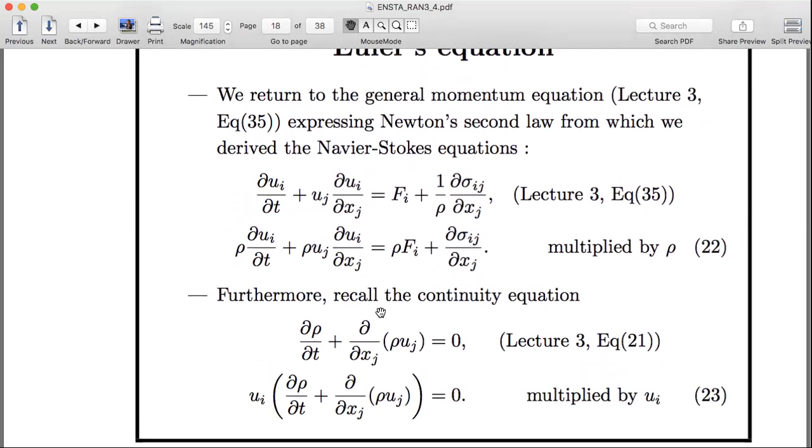We leave it in momentum form, but we just go back to the control volume version, as you'll see here. So we return to that general momentum equation, which is not the Navier-Stokes equation, but it's the one written here. It's not Navier-Stokes because I have the stress tensor.

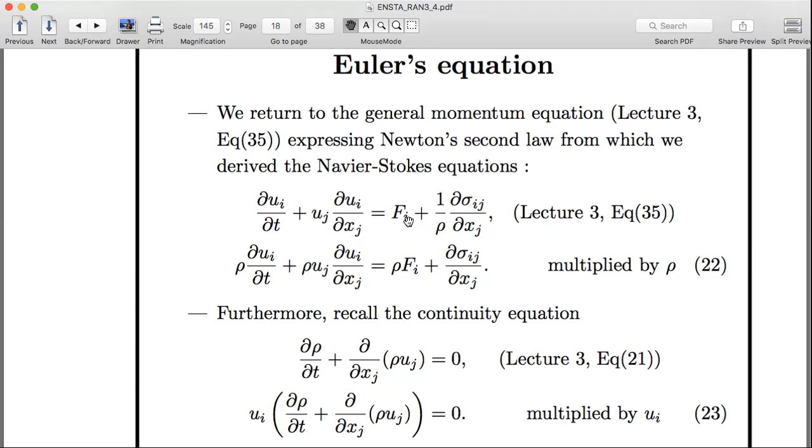It's Newton's second law applied to a continuous medium, a fluid, but I haven't committed myself on the form of the viscosity, so I just left the stress tensor in its general form here. Then I multiply by the density so that it appears in the numerator in all terms except the stress tensor.

And then I'm going to use the continuity equation, which was also from lecture 3. Remember, that's the one with a funny name, but it actually expresses the conservation of mass for a continuous fluid, a continuous medium. But that one I multiply by the velocity.

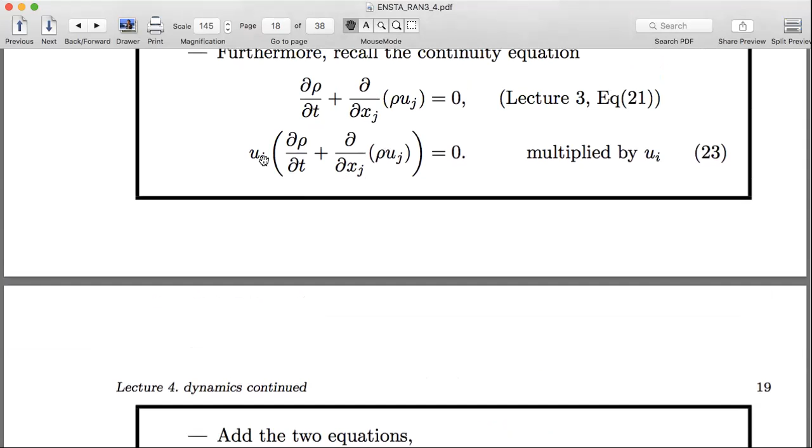So I'm multiplying by u. It's important to pay attention to the indices, so I'm multiplying by ui, not uj. The j index here is the same as the one there, and then I multiply by i. So there's a sum over j, and then all that sum is multiplied by ui.

And then we add the two equations, and we get this equation. There's just 0 on the right-hand side of 23, so it doesn't add anything, but on the left-hand side, we have this extra term.

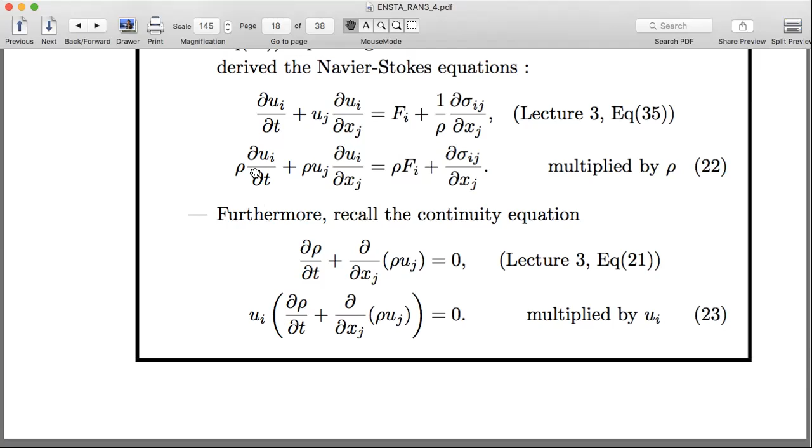Here I have rho times the partial derivative with respect to t of ui, and then here I'm going to have ui times the partial derivative of rho with respect to t. When you combine those, the motivation is to be able to combine those two terms, like this term and the first two terms here, they're going to combine to give you this one single term.

And similarly, with the third and fourth term, you can join those two together and write them like this. So that should be familiar from differential calculus.

So this is like our general momentum equation. This is valid for a general continuous medium, such as a fluid. So we're more general than Newtonian fluids here.

And it does not have to be incompressible either, right? It could be a compressible fluid. So this would apply at high Mach number in the atmosphere.

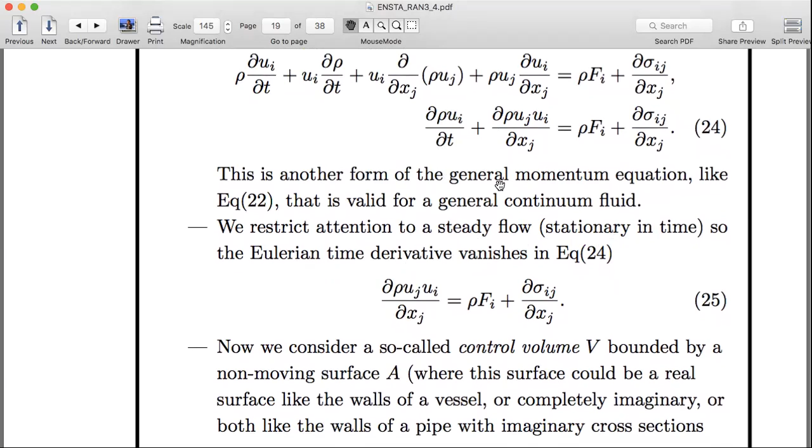But let's start introducing some restrictions to simplify this. Let's apply it to the case of a steady flow, in other words, it's stationary in time. So the Eulerian time derivatives vanish, so this term no longer appears, but I still have the advective term. That's all I've managed to do with that stationary time approximation.

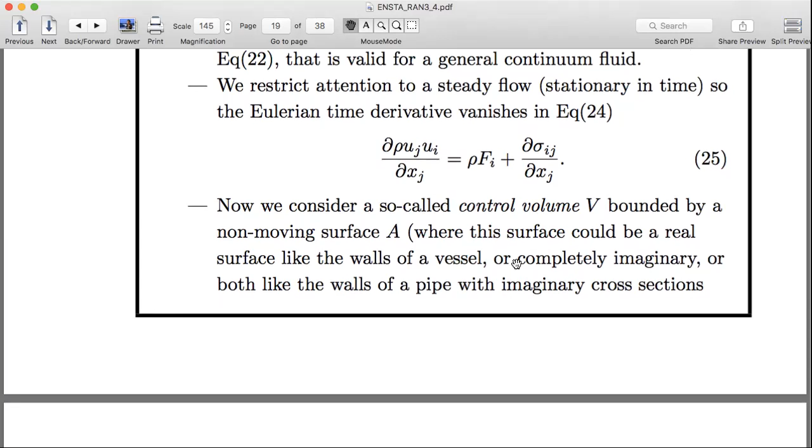And now we consider this applied to a control volume V, an imaginary surface that we cut in the fluid. It's important that that control volume be inertial. I suppose it could move with respect to our reference frame, but it would have to move at a constant uniform velocity. But the simplest thing is that it's not moving, it's just an imaginary surface, just to allow us to talk about a certain volume V of the fluid.

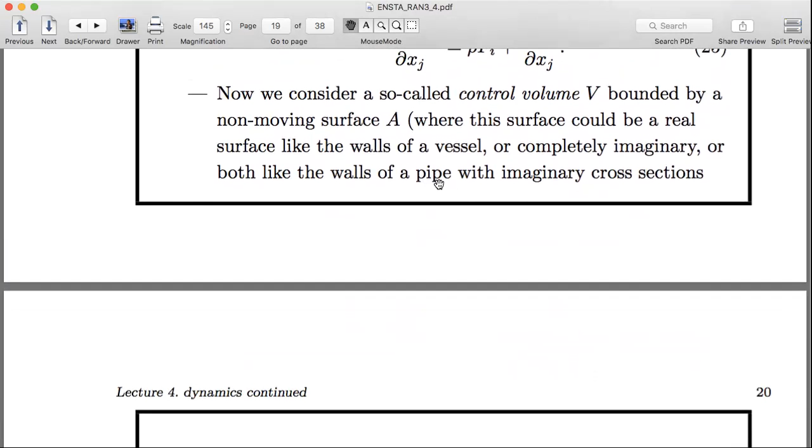But it could happen to. Sometimes we line up those imaginary walls with the real walls of the vessel or the pipe wall or something.

But it is required to be in the fluid. We're not allowed to take it out of the fluid. That'd be cheating.

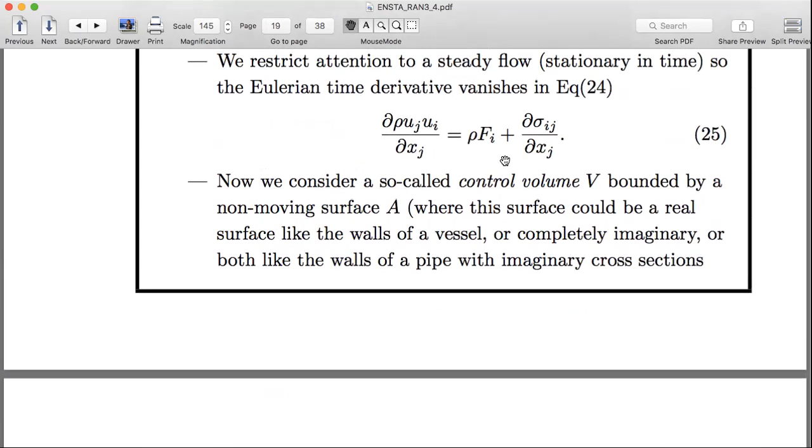And then we integrate this equation, number 25, over the volume V. So what does that mean? When you integrate that, that's just a differential equation. How do you integrate that over a volume?

Well, you take your volume V, you cut it up into a large number of little volumes, for example little cubes, each of volume dV. And if these have a very small volume dV, then these quantities here in the integrand will be essentially constant.

And these terms here, by the way, are the terms that we saw in equation 25 - that's the equation we're integrating. So you multiply their value at that point in the volume V by the little dV, and that gives you a value, and then you add that up over all these volumes. Technically, you're taking the limit where dV goes to 0, so you have an infinite number of those things to add up, and so you call it an integral. An integral is like a continuous sum.

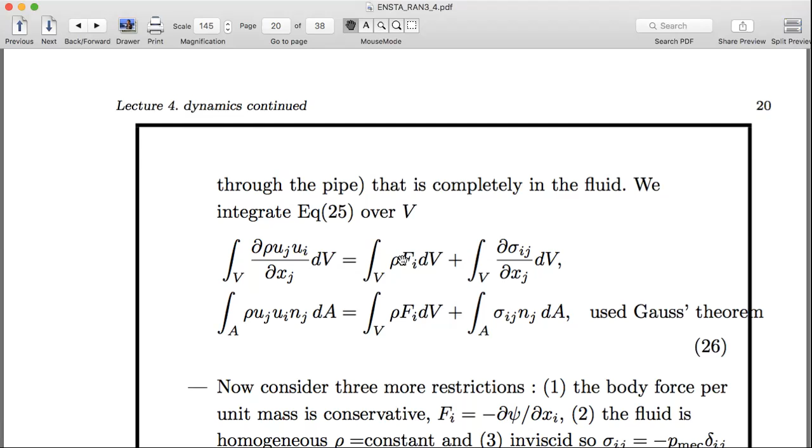So I do that for each of the terms in equation 25. You're allowed to just do it to the left-hand side and the right-hand side, and then break that into two separate integrals. It's because of the linearity property of this integral operation.

And then I'm applying Gauss's theorem to two of the terms. And how did I pick out these two terms? Well, because those are the terms that have a partial xj here - partial xj from the advection and from the divergence of the stress tensor.

So this is sort of going the other way in Gauss's theorem, but Gauss's theorem goes in both ways. When we have a partial xj in a volume integral, you can pass to the corresponding area integral by simply taking the thing in the numerator and multiplying it by the normal vector.

Which component of the normal vector? The nj - the j has to be the same as the j there. And so here I have a sum over j because there are two indices j, and I still have the two indices j here. It's just now it's on an nj.

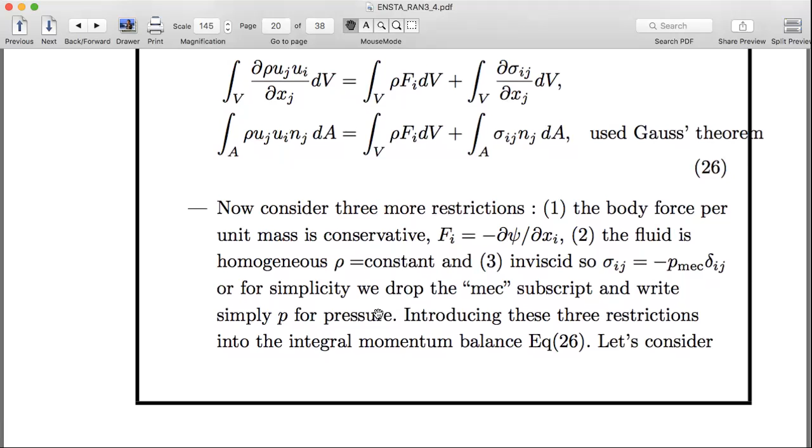So Euler also considered the case of rho being constant and the body force being conservative. In other words, you can write the force as the gradient of some potential, and I've written the potential psi here - normally psi would be the gravitational potential. We're not going to write little MEC everywhere to remind us that it's the mechanical pressure - it's the mechanical pressure that enters, and we'll just call it P.

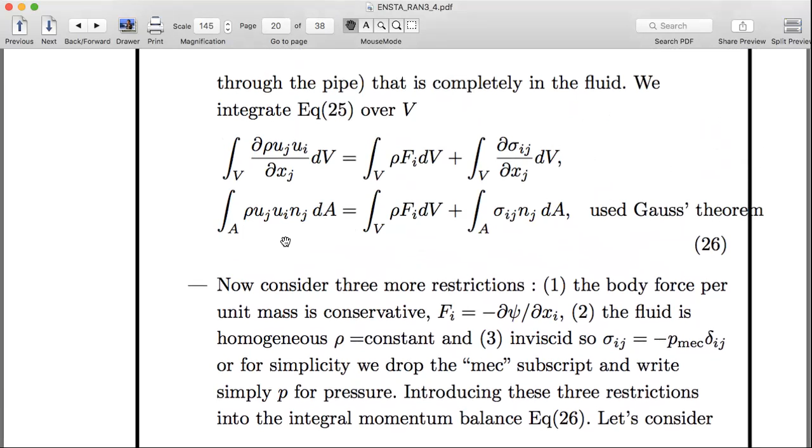So we introduced those 3 restrictions in this balance that we derived quite generally for a steady flow. It was a very general fluid, but steady flow, no Eulerian time derivative. Now we introduce these 3 inviscid, homogeneous, conservative body force approximations, and we get

the term simplify. So let's go one by one. Let's look at the body force integrated over the volume. Well, the body force was a gradient, because it's conservative, it's a gradient of a potential.

But if it's the gradient of a potential now, and we're integrating over a volume, we can do that Gauss's theorem thing and replace the partial xi with an n, and the whatever's up here in the numerator, psi times n. Which component of n? Well, it's the thing you took the derivative with respect to. So instead of xi, it's ni here. And it's an area integral here instead of the volume integral. And

rho is just a constant, so I can bring it inside the integral here. It's like bringing it inside a sum of an infinite sum. Okay, so that was the body force term.

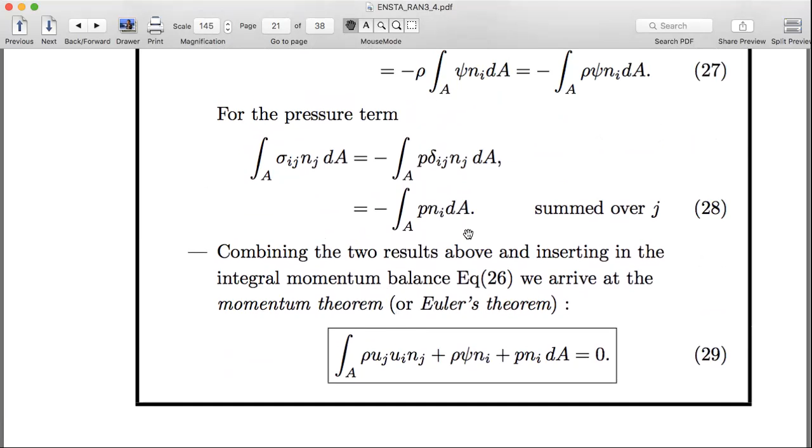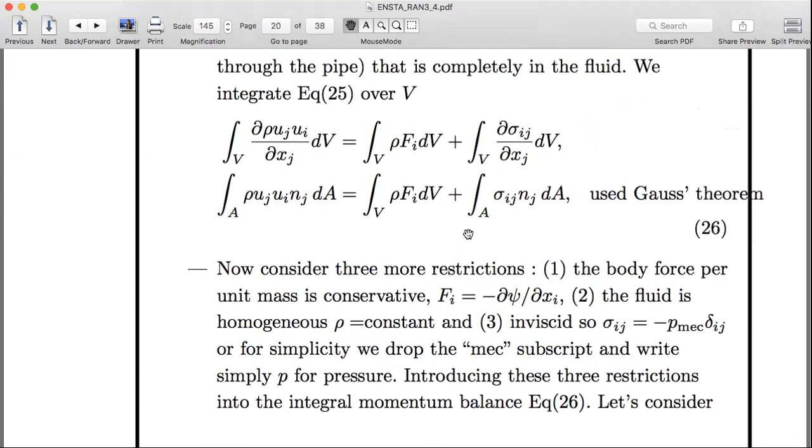So there was a third term, but we'd already applied it as an area integral. So now we can just substitute this result and this result into our equation here. And so we have three area integrals in our equation that look like this. We brought them all to the left-hand side. And

This result is known as the momentum theorem or Euler's theorem. It's a famous result in fluid mechanics.

Euler was a Swiss mathematician who lived before Gauss. It was in the 18th century. He was from Basel, Switzerland, and did a lot of this fundamental work in mechanics and fluid mechanics.

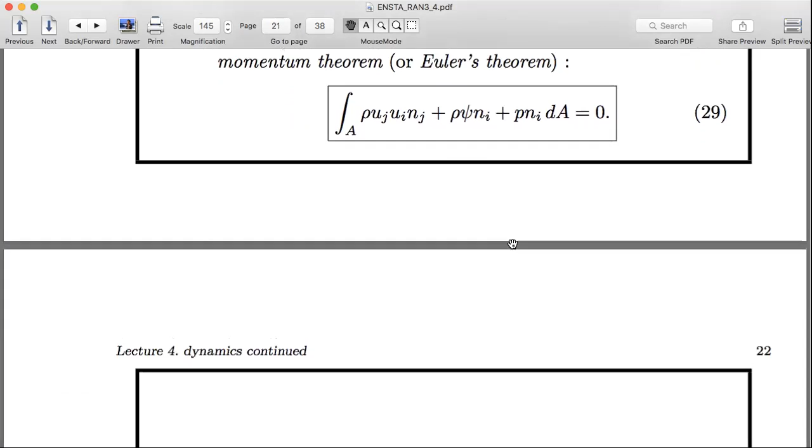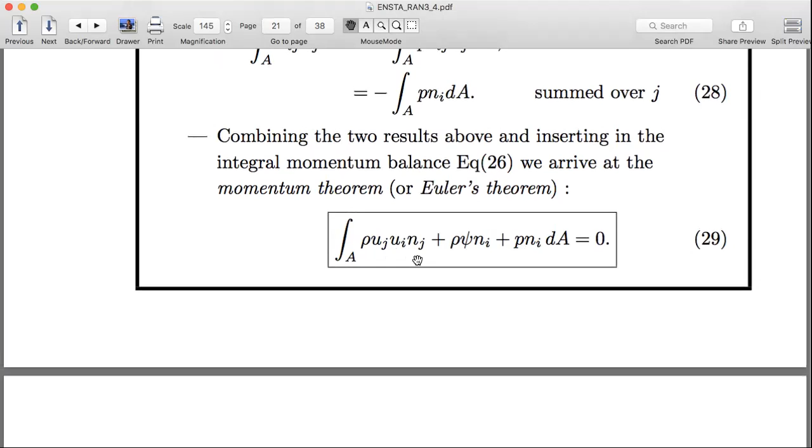We can interpret this physically. So this flux of momentum through the surface A has to be balanced by the potential energy term, if this is the gravitational potential energy, and the integral of the pressure along the surface.

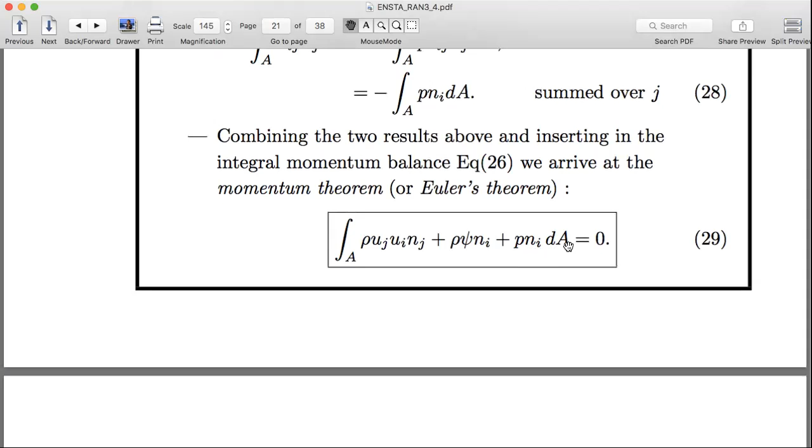And these are forces acting on the fluid on the interior of this surface by the fluid that's exterior, or at least in the case of the pressure. And in this rho psi term, it's not the fluid that's acting on it, it's the external gravitational field that's acting on the fluid at the boundary of this volume.

And this term is the momentum flux. I hope that's, well, maybe that's worth just a couple words explaining why this is a momentum flux. Let me cover up this.

So I've got two U's there, right? U is the velocity. Let me just cover up one of them, and then we'll bring it back in later. So I have one. But if I do that, I can't point. Darn. So just imagine that UI is not there. I only have one mouse, so I can't cover it up. But

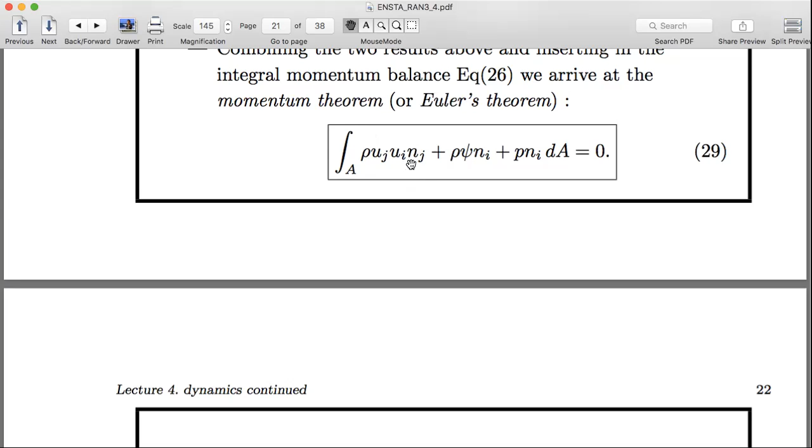It's balanced. This flux integrated over the whole area has to be balanced by these conservative forces and this pressure force.

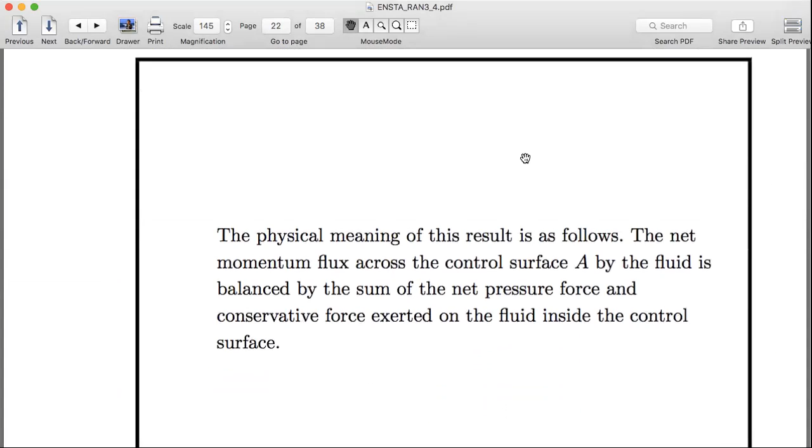Okay, let's see how we've just derived two important theorems in fluid mechanics: Bernoulli's equation and Euler's theorem, and they were energy and momentum equation balances respectively. We'll see how they help us in practical situations. We'll start with, and then both of those are going to be useful in deriving Betz's law, which I hope won't be too long - I think I have just the perfect amount of time, 10 minutes on each.

So let's use Euler's theorem, the one we just derived, to find the force on an array of rigid bodies inside a flow. It doesn't matter too much what these rigid bodies are - you could imagine a wire mesh that's used to filter something.

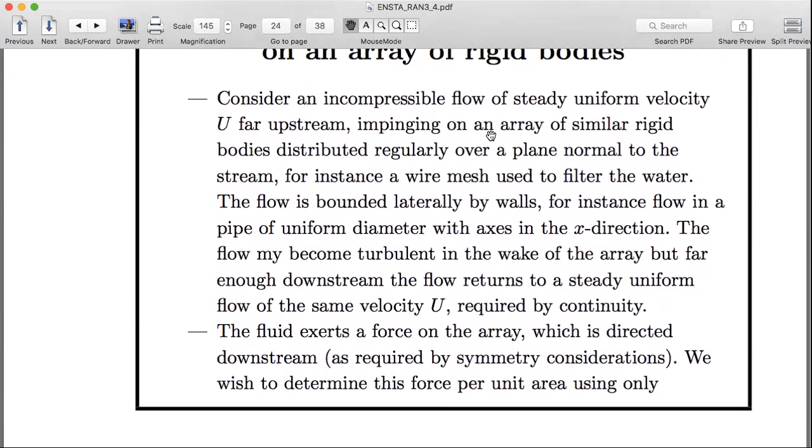Yeah, it could be like a filter or some kind of grating. Well, we can read the text here, but then quickly we're going to look at the diagram. Otherwise, I find it doesn't make much sense.

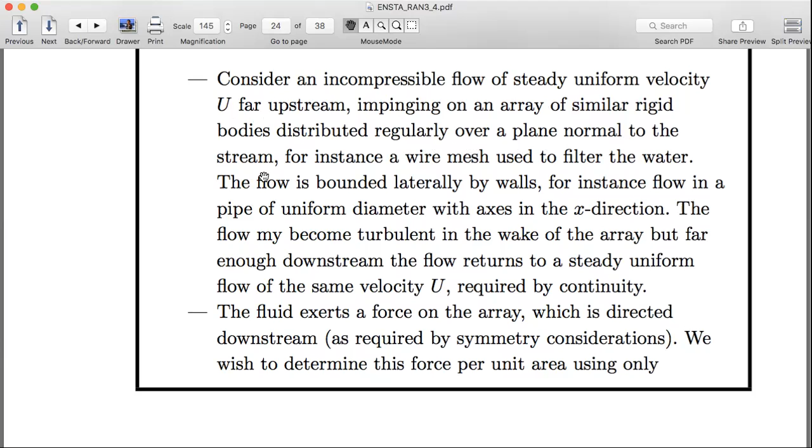So let's consider an incompressible flow that's steady and uniform velocity, capital U, far upstream, and it's impinging on some sort of array, say a wire mesh, that's normal to the velocity, and the flow is bounded by some walls. Could be a pipe, a channel, or a canal - like a river where we have a dam, and then put a pipe with some kind of mesh to catch the large things floating in the water.

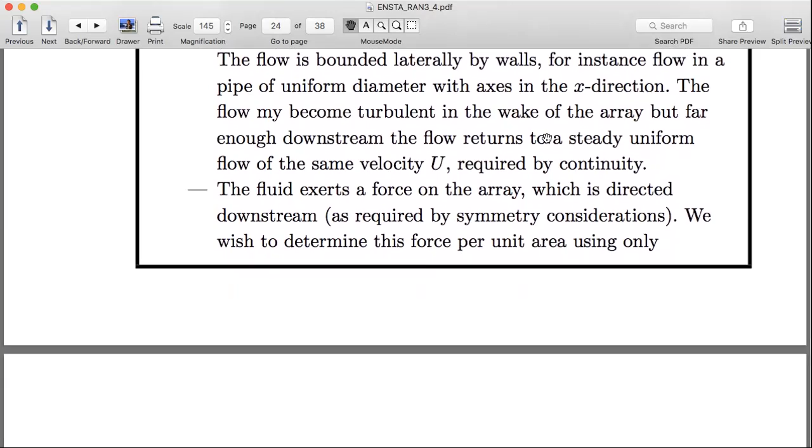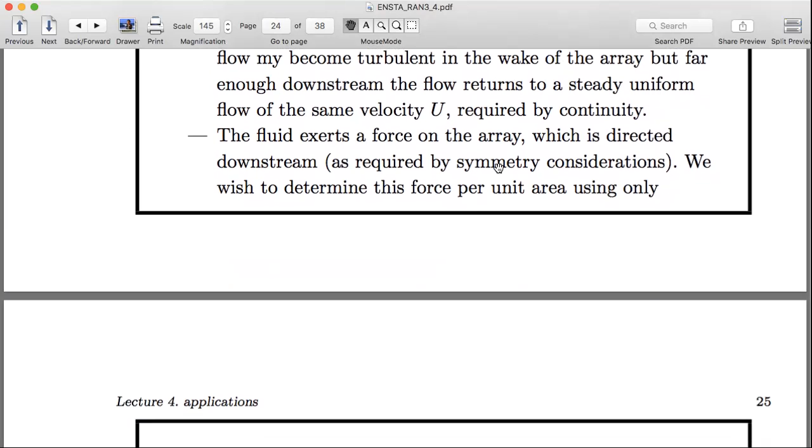And our goal is to find the force exerted on this array or this wire mesh per unit area, and we want to use only fluid properties measured far upstream and those measured downstream.

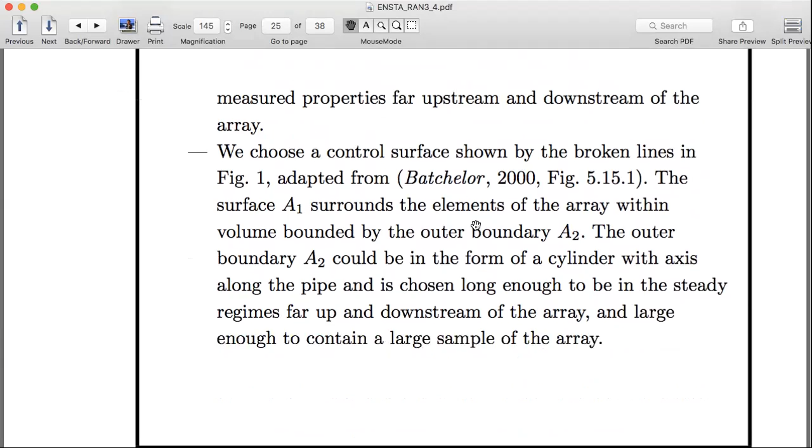So let me show you the diagram here. Here's our flow field far upstream, and as you see, it's a uniform flow - the velocity doesn't vary in the cross-sectional direction. Just to give it a coordinate system, the flow is along the x-axis here, so the y-axis is perpendicular to the flow, and there's a z-axis pointing towards us away from the screen, which we won't need.

Then far downstream, we have the same uniform flow, and the cross section of this pipe, channel, or canal is the same area, delta A, as it is upstream. It's a constant density, so by mass conservation, if the flow velocity is u here, it has to be u downstream too - otherwise we'd be building up mass here in the interior or losing mass. So the mass flux here is the same as the mass flux there, the u is the same, and delta A is the same.

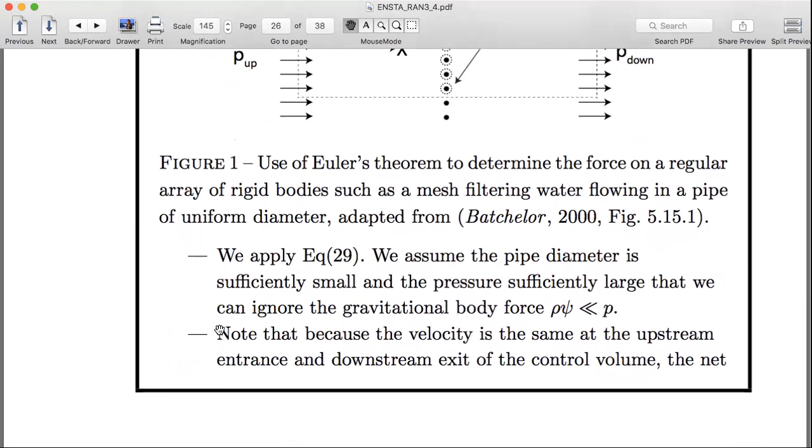We're going to assume that gravity is not important in this problem. So we have a narrow pipe, for instance, or if this is a channel, it's a narrow or shallow channel, without any changes in height. I think I said this already, but the velocity is the same upstream and downstream.

But that has an important implication. It means that, remember in that Euler's theorem, there were three terms: the momentum flux term, the potential energy term, and then the pressure term, all acting at the boundary. Well, the momentum flux term is zero, or it integrates to zero.

Why is that? Well, there are only two places where this term is non-zero when we do this integral. It's when this velocity uj is parallel to nj, so the flow is across the boundary.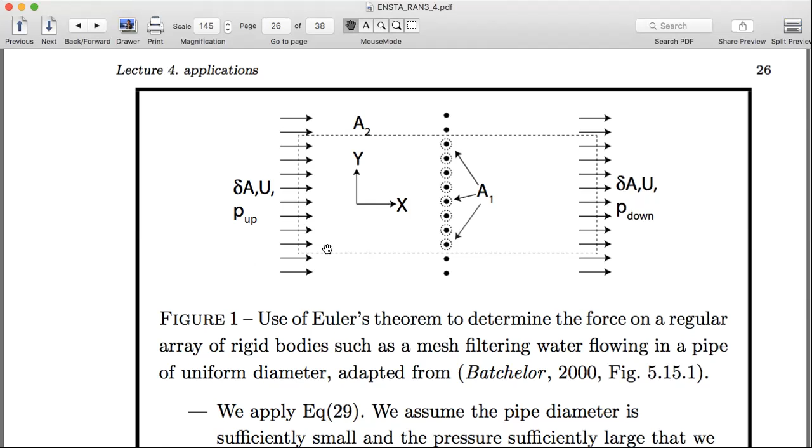But here we have a positive term because there's flow in the direction of the outward normal. But here we have an equal and opposite term because the velocity is flowing parallel to the same normal, but the normal's in the negative x direction, so you get a minus sign here. So this momentum flux exactly cancels this momentum flux, and it's zero along the other boundary. So this integrates to zero.

And we've said we can ignore gravity, so we got rid of gravity. We just got rid of momentum flux. We're left only with pressure. There were only three terms, now we're down to one. So the integral over the surface of this control volume of the pressure times the normal unit vector is equal to zero.

Okay, well, that's our simple equation, but there are actually three components to this equation, right? Because we can choose i to be in the Y direction, the Z direction, but the interesting one is in the i equals 1, or the X direction, because that's the direction of the flow.

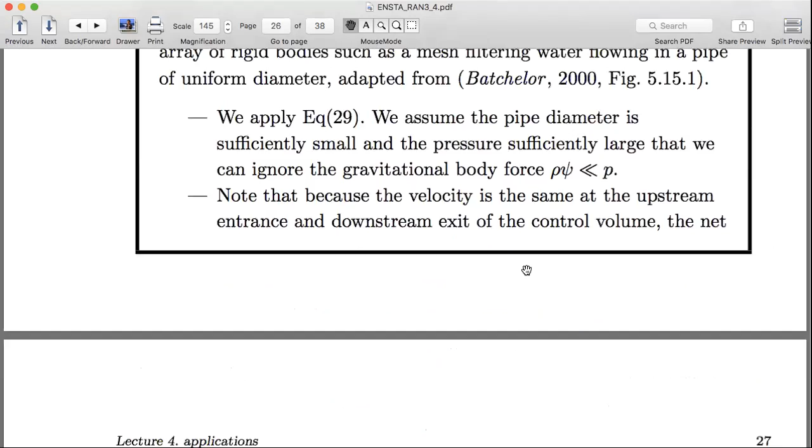And then on the surface A2—now I've forgotten which is 2 and which is 1, yeah, so this is 2 and that's 1—on the surface A2, the cross-section normal to the flow contributes delta A in the upstream direction. The normal is in the minus X direction, so I've written that as minus i vector here. And the pressure at that point on the surface was P upstream, right? P up here, we're talking about this part of the surface. So that's minus unit vector in the X direction, P upstream times delta A.

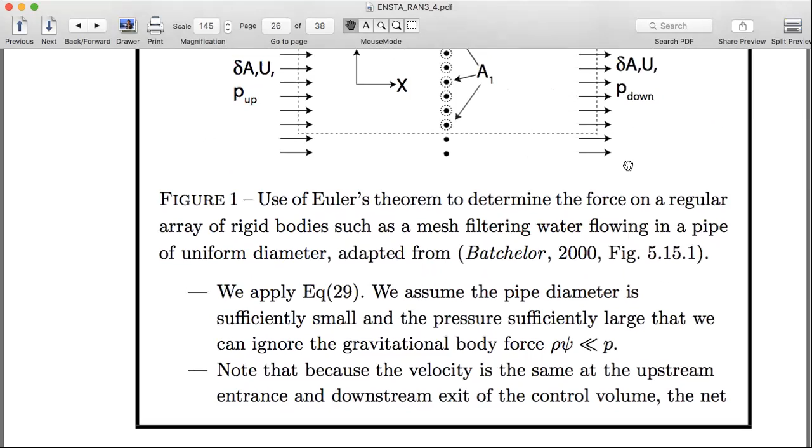So that's, I'm just breaking this integral into the parts that are non-zero. This is one non-zero part across that surface, the upstream surface. Downstream, the normal is pointing outward in the X direction, so this is the i vector, unit vector in the X direction. The pressure there is P down, and it's the same area, delta A. But now we could also integrate this integral over these control surfaces here that are on the interior.

And there would be some pressure there, but we don't know what it is. But whatever it is, it leads to the force on this array, on this wire mesh thing. But that's the thing we wanted to know. So even though that's the unknown in this equation, let's just write that as F array, the force on the array, the total force, and then we're going to divide it by the area later to get the force per unit area, I think.

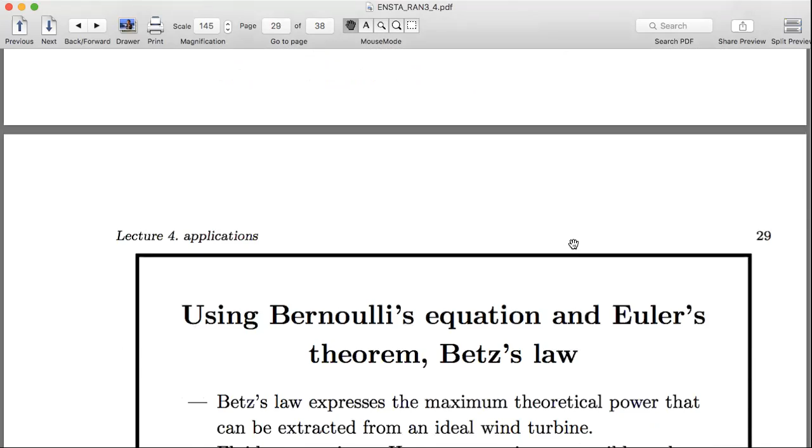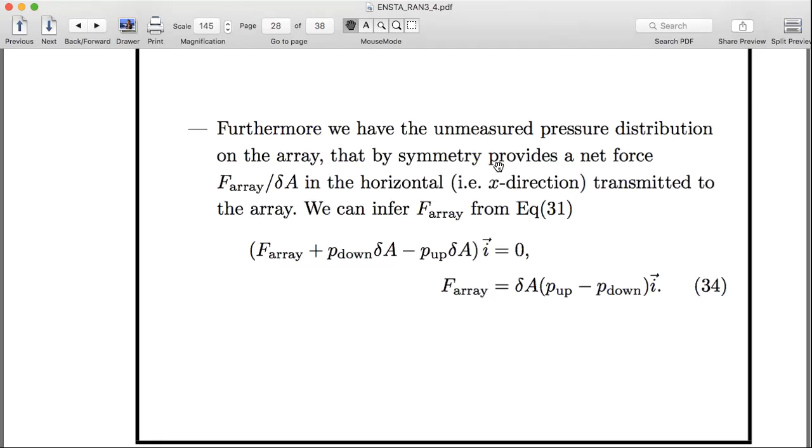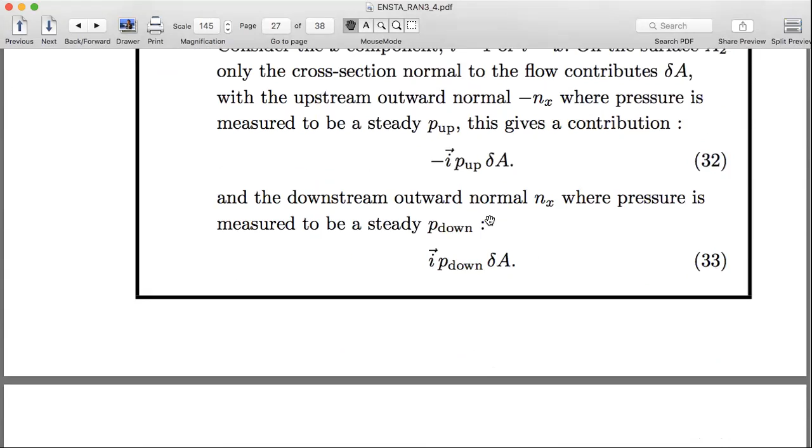So that's a nice application of Euler's theorem in a only slightly artificial, well, it's a restricted example, but a real world sort of example. And in fact, we're going to use that in a minute. I think I'm not going at my correct speed, right? I took 5 minutes too long, so now I have to.

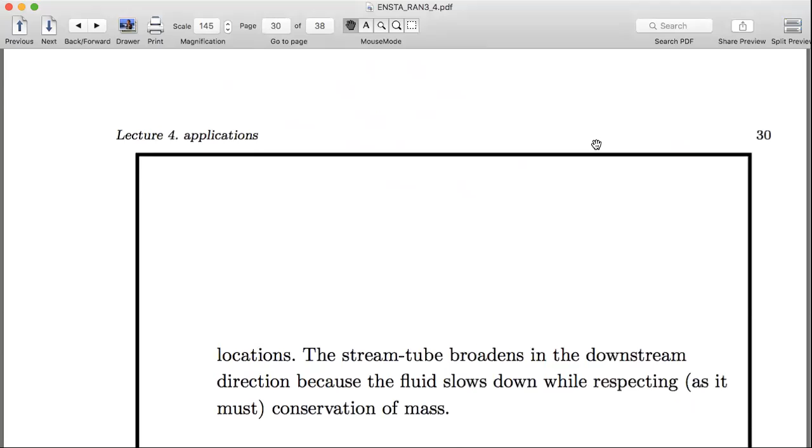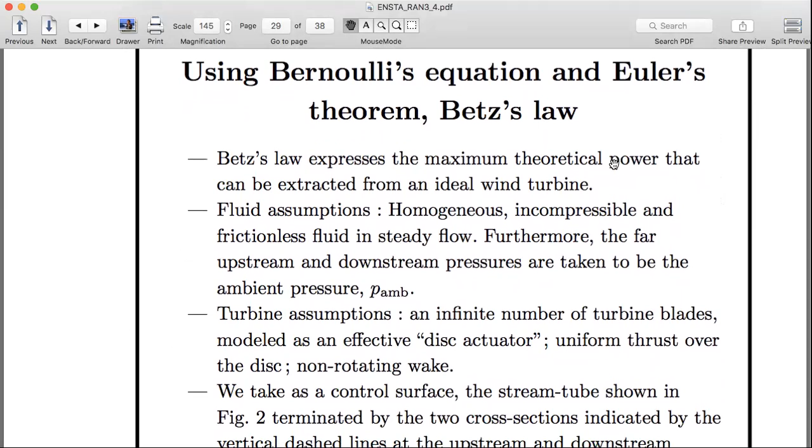No, because yeah, no, I'm okay, because I thought I had to go through Bernoulli's equation separately, but it's actually within this thing, so I should be okay.

Now we're going to derive Betz's law, which is a law that expresses the amount of power you can extract from a wind turbine. But this is an upper limit. So we're going to make idealizations that allow us to extract the maximum amount of energy. And that will be like an ideal case. I've read that in real world applications, one can approach about 75 to 80% of this ideal limit. So you can get up to 80% of Betz's limit.

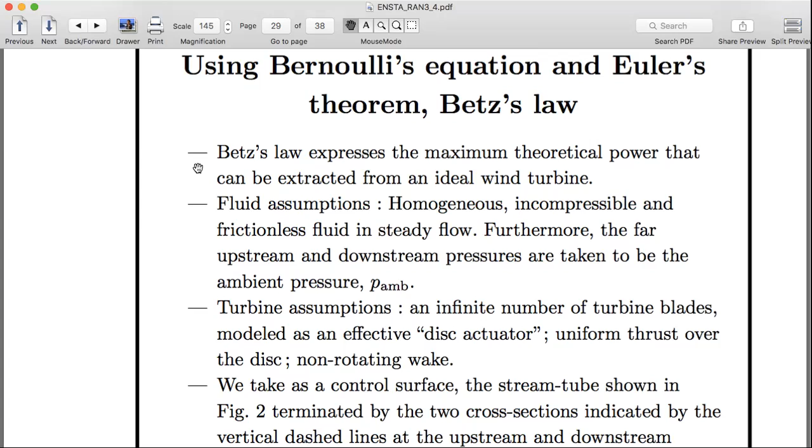So it's a useful idealization, but in reality you tend to get less than that. Not surprisingly, because we're going to see that we assume the flow is inviscid, so we have no frictional losses. We assume we have an ideal turbine, etc. You'll see as we go through it. So it's a maximum theoretical power that can be extracted from, for instance, a wind turbine.

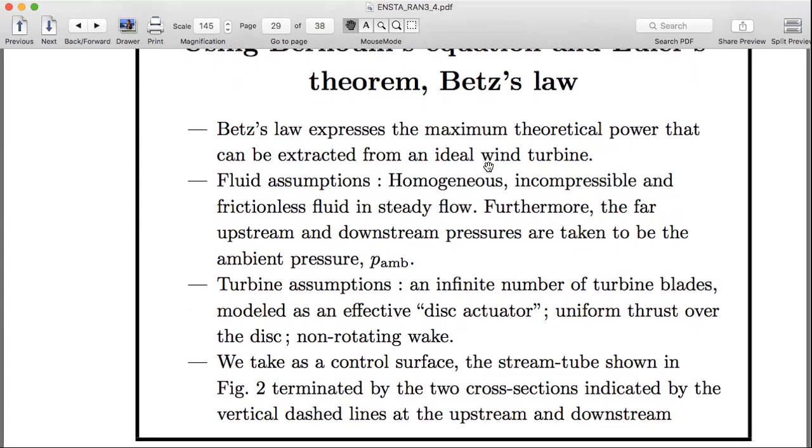It didn't have to be a wind turbine. It could be a turbine in the ocean. It could be in any fluid, any situation where you have a fluid flow and you're trying to extract energy from it using a turbine.

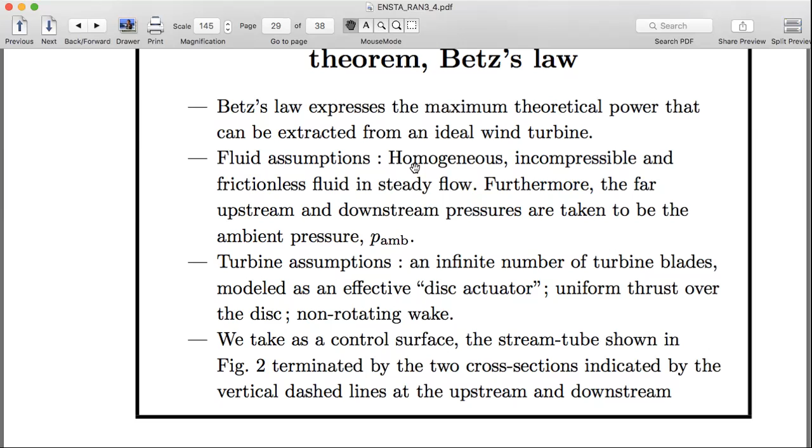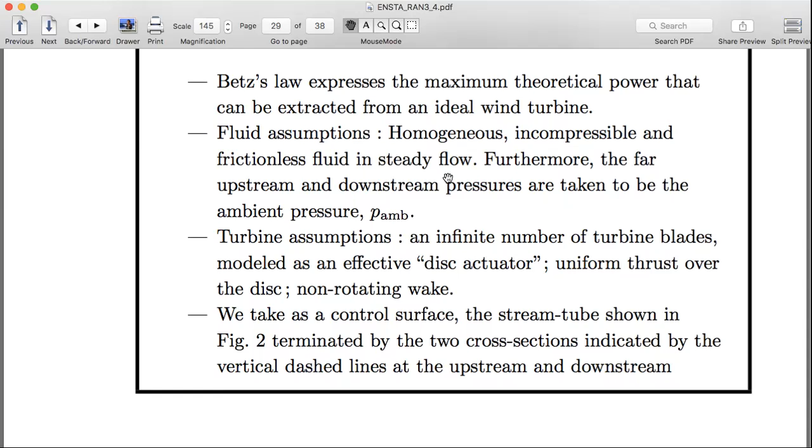We assume it's largely to simplify the analysis, but also to make it the ideal situation, the maximum yield. We assume it's a homogeneous, incompressible, frictionless fluid in a steady flow. Steady flow simplifies the analysis. Frictionless makes it the ideal limit. And incompressible, as we've seen, is a very good approximation in the atmosphere and the ocean. And homogeneous says the density is constant. It's actually a reasonable approximation as well, but also simplifies the analysis.

So for the turbine, we assume that it has an infinite number of blades. We're going to call it the disk actuator, but just imagine a wind turbine. And the thrust is uniform over the disk, and there's a non-rotating wake. In real world situations, when wind flows over a turbine, some energy is lost because it goes into rotational motion of the flow downstream. So we're going to idealize the situation by imagining we can reduce that to zero, to get the upper limit here. That's our strategy, our goal.

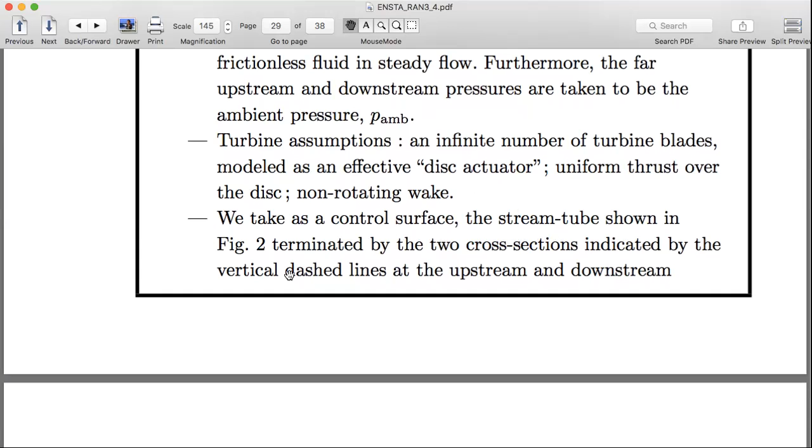So we take a control surface, which is a stream tube shown in figure 2. Here's our situation. We have an upstream flow, and an ambient pressure, like one atmosphere, upstream. It doesn't have to be, but just some ambient pressure, for example 1 atmosphere, if it's in the atmosphere. And then we have some upstream, uniform upstream velocity and some area upstream, but the upstream area is the area here of the boundary of our control volume.

Here's our control volume. So it has an upstream entrance of area delta A upstream, which is this area here. But then it's also bounded by another part of the boundary, which is formed by the stream tube. Remember, we learned the stream tube was the surface created by the stream lines.

And we have an ensemble of streamlines. What streamlines? Well, they were the streamlines that passed through a set of starting points that form a closed loop.

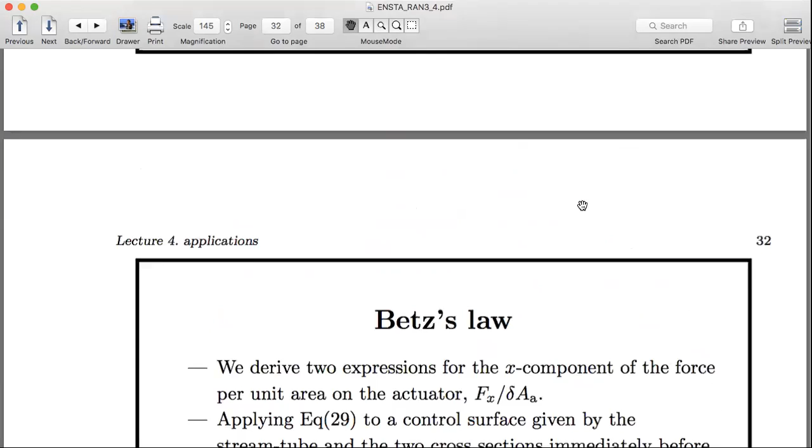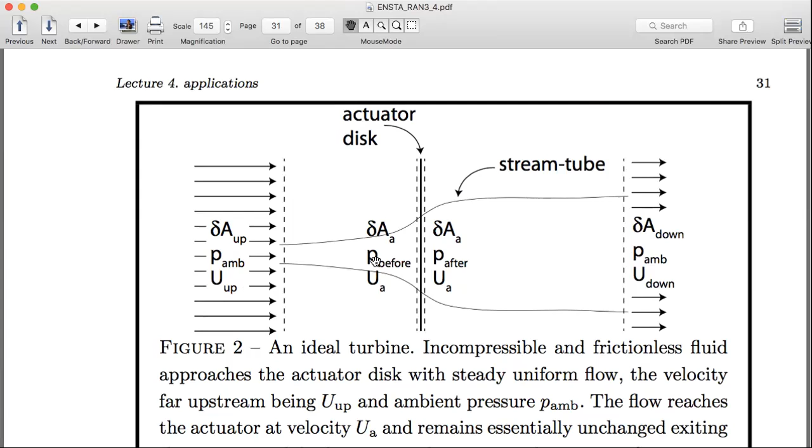Okay, so we start with our strategy, which is going to be to find two expressions for the x component, x being along the axis here, of the force per unit area on the actuator or the turbine, if you like. So it's actually a lot like the grating problem that we just did, or the wire mesh, except that now we have a momentum flux to consider, because the velocity is higher upstream than downstream, and the area is smaller upstream than it is downstream. So it's a bit like the wire mesh problem, but more complicated.

So we can use our Euler theorem, equation 29. Actually, we can do exactly that analysis that we just did on the wire mesh, but we have to be careful which control volume we apply it to.

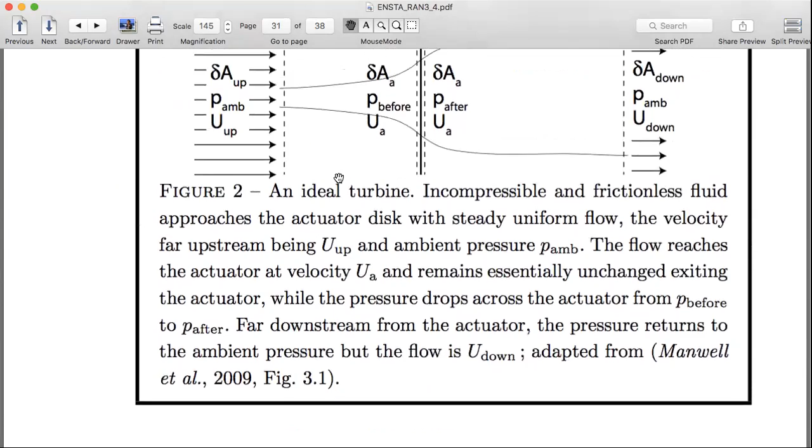We can imagine a new control volume embedded in the old one, which is this control volume here. Can you see that? There's a dashed line. The solid black line is sort of my turbine, the actuator disc or turbine. These are the turbine blades that, in this ideal representation, are infinitely thin. So I drew them as a vertical line here.

They're spinning around. But then just upstream, I have a control surface, and then just downstream of that infinitely thin turbine blade, I have another part of the control surface. So I'm considering a new control surface just around the turbine.

But why did I do that? Because then it's not strictly true that the area downstream—I shouldn't call it downstream, but just after the actuator—I'm going to call that area delta A actuator. Actuator is just another word for the turbine. And then delta A upstream, just upstream of the actuator, is delta A. It's essentially the same A here. It might be a tiny bit smaller, but in the limit of an infinitely thin turbine, this A would approach that area.

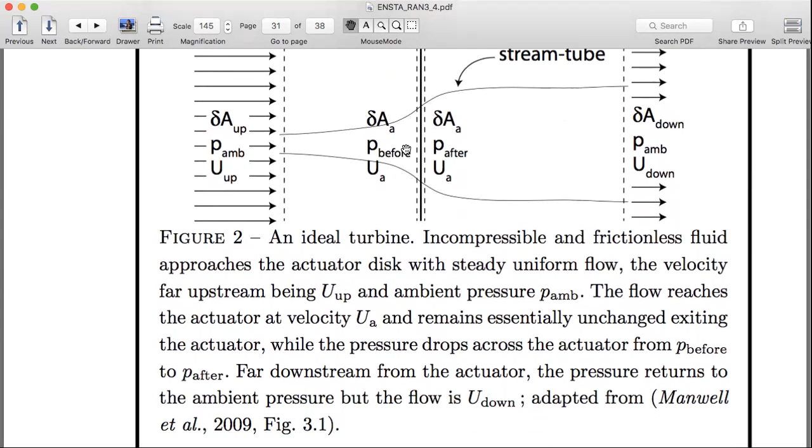So I do that integral, it all just collapses down to this. Okay, so I need to know this P before and P after. How am I going to get the P before and P after? Now I use... oh, I'm really running out of time.

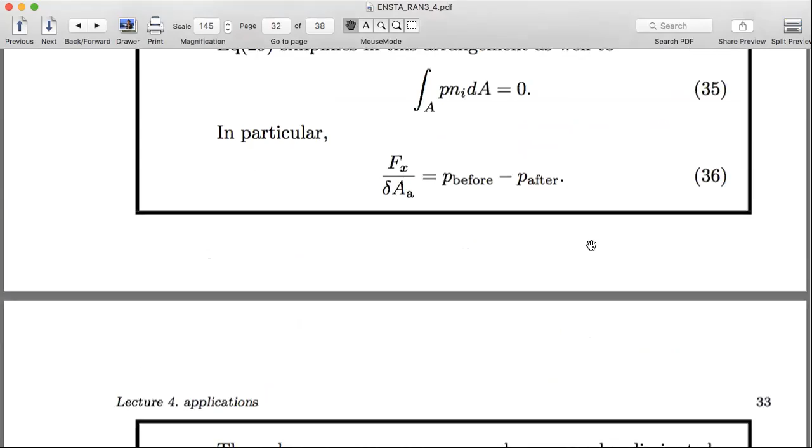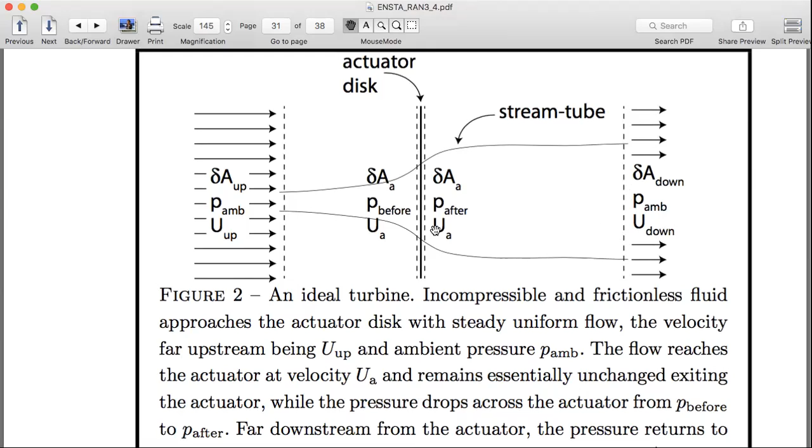So I applied that Bernoulli's theorem twice. I take the difference between these two Bernoulli theorems. Why do I do that? Well, this term will cancel that term, and this term cancels that term. And so then I just have this difference in the kinetic energy density between the flow far upstream and far downstream equals the difference in pressure far upstream, just before the actuator and just after the actuator, because far upstream and downstream it's the same—it's the ambient.

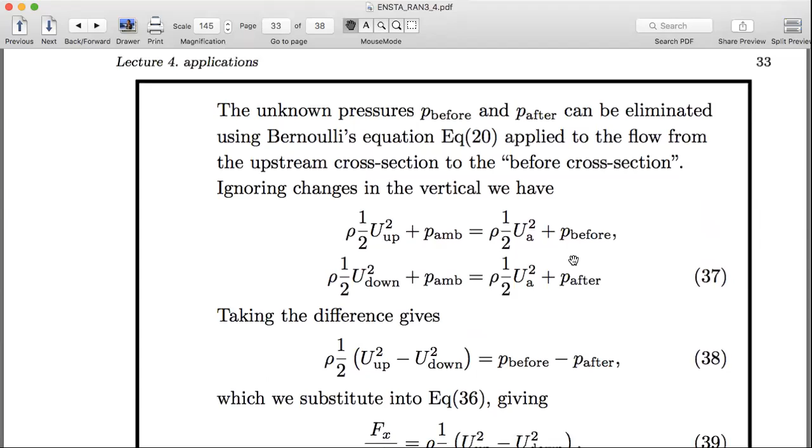So that's useful, right? That's the pressure difference I wanted to get my force here per unit area on the actuator. So it's just related to this kinetic energy density far upstream and far downstream.

Okay, that gives me my force, but the problem is I don't know the far downstream velocity, and furthermore I don't know how to optimize this thing. Remember, the whole goal was to optimize this thing, to choose the arrangement such that the downstream velocity was the ideal compromise, giving me the maximum force per unit area. It's actually the force times the velocity, right? Because that's going to give us the power rate. Well, we'll get to that in a second.

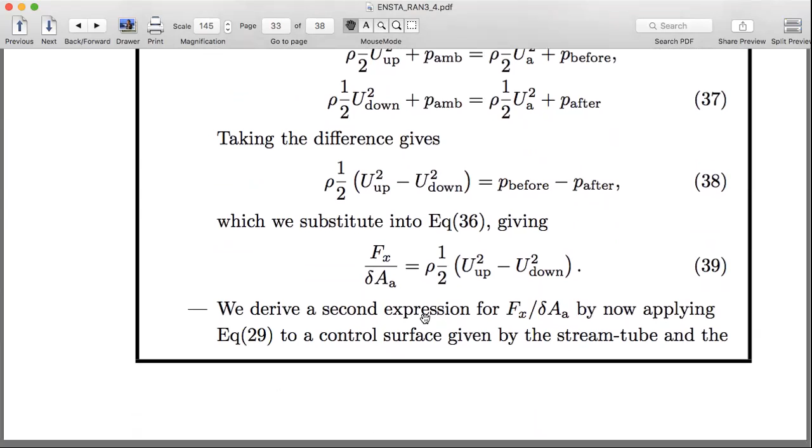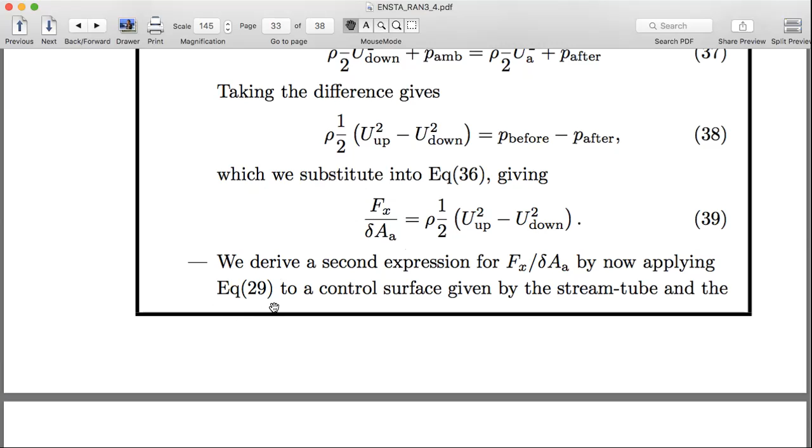Okay, so first I want to resolve this ambiguity by getting a second expression for exactly the same quantity here. And I do that by applying this momentum equation to a control surface with this stream tube. Yeah, sorry, this is the one I started to apply it to at the start. I want to apply it to the control surface made up of this stream tube and the two open ends far upstream and downstream.

When I do that, I have the momentum flux far upstream, plus the difference in pressure across the actuator—this is just looking at the x component of that integral—and then I have the momentum flux out of the domain at the far downstream outlet, what I was calling the outlet. And so that's the main expression, which comes again from that Euler theorem applied to this big control volume.

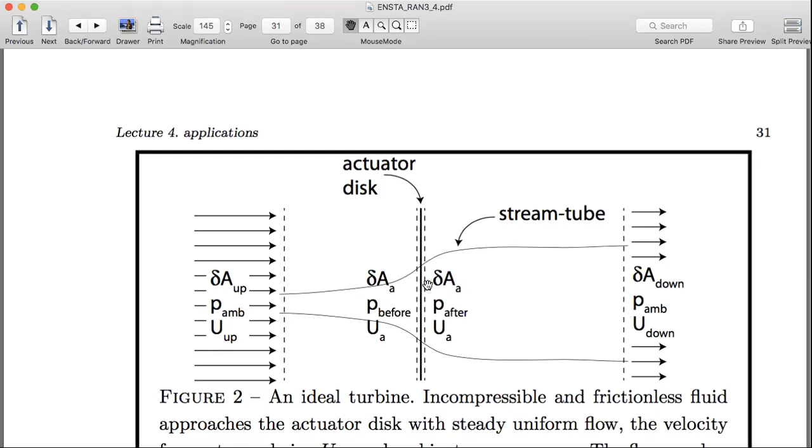Maybe I'll just outline this because I did this before, but then I didn't apply it. So this is the big control volume that we just applied that Euler theorem to. First we applied it to the little control volume there, but now we apply it to the big control volume. And then, to manipulate this, it's convenient to recognize that the density times the upstream velocity times the area of this inlet upstream—that's the mass flux, right?

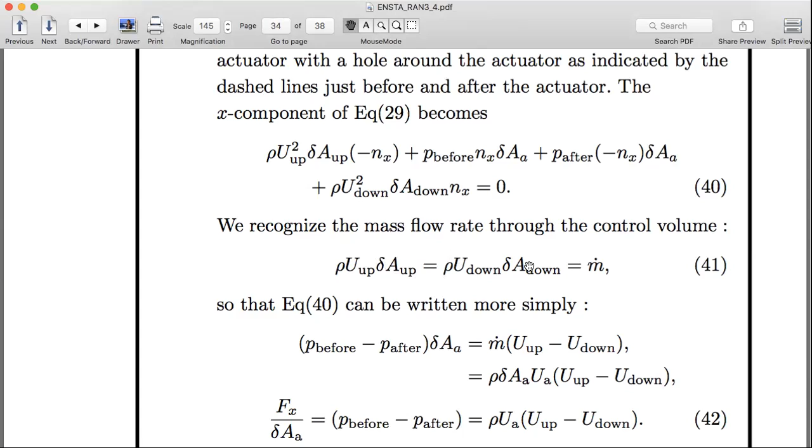As I've argued a few times, this is a volume flux per unit area times the area, times the mass per unit volume. That gives you a mass flux, so it has units of mass per unit time fluxing into our system. Mass is not created or destroyed here, there's no sink, so that has to equal the rate at which mass is leaving the system. Let's just call it m dot, the mass flowing out at the downstream end, the outlet.

Bearing that in mind, we can write this term like this: just take out one of these u's here, and then you have rho u up delta a up, which is m dot, times that u up which we took out.

What happens here? We take p before minus p after times the delta a. We've recognized that nx is a unit vector in the x direction, so we're only considering the x component. We've moved the other terms to the right-hand side, so there's a minus in front of the u up squared term. But this u up squared term is really just u up times m dot.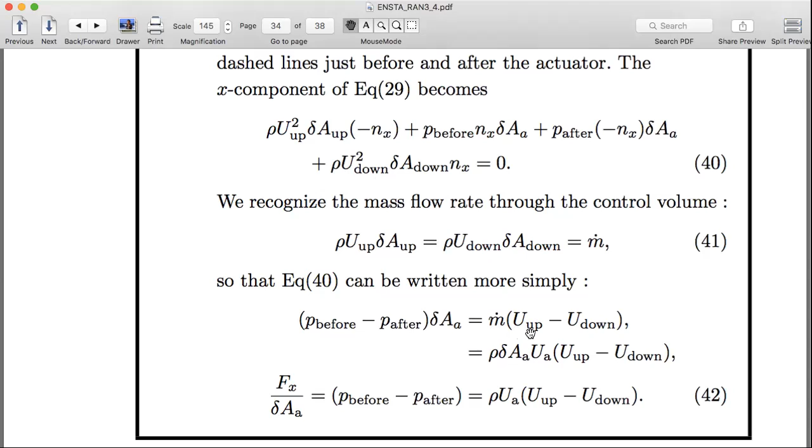This other one, I realize some of this algebra is a little hard to follow, but it's all there, and if you work it out, you'll find - I'm just doing algebra at this point - it's m dot times the difference in velocities far upstream and downstream.

Then you can apply this m dot with the flow velocity anywhere. It could be the flow at the actuator, but you have to use the right area, the area at the actuator. So the density times the area of the actuator times the velocity at the actuator equals the mass flux m dot times this difference in far upstream velocity and far downstream velocity. And that too equals the force per unit area on the actuator.

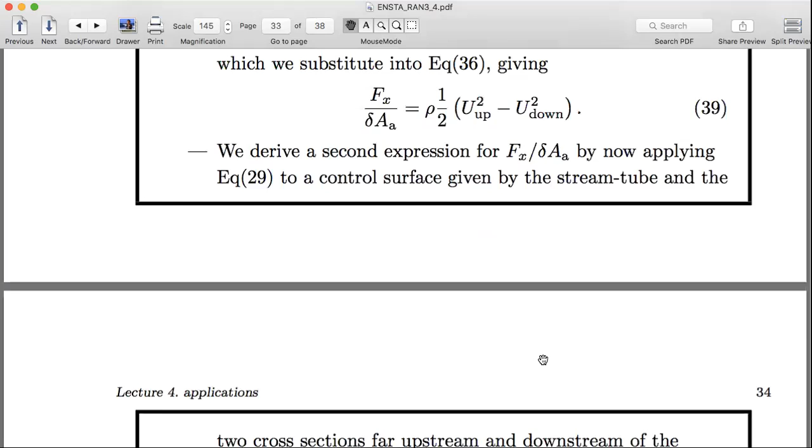So now we have two expressions for the force on the actuator: one involving the squares of the velocities, and one involving the actuator velocity and the up and downstream velocities. So we're going to set those, equation 42 equal to equation 39, because they're both two expressions for the same thing.

You should go through this again at home, but work through this step by step. You'll see when you set these two equal, you have something squared. So some hints: you can write the difference of these two square terms as that one minus that one, times that one plus that one, because the cross terms cancel.

But that's useful because I have u up minus u down, and I have a u up minus u down here, so I can cancel that and cancel that. I'm left with: actuator velocity equals one half the sum of the upstream and downstream velocities. That's a remarkable result - it didn't have to be this simple, but it is. The velocity at the actuator is just the linear average of the upstream and downstream velocity. Amazing.

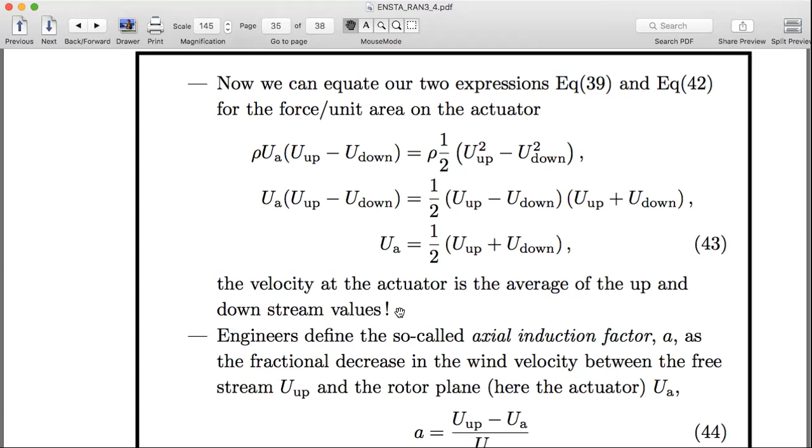So this UA has a name - the axial induction factor, A, is the fractional decrease in the wind velocity between the free stream U up and the rotor plane, the actuator velocity UA. We take U up minus UA and normalize it by U up, and that gives you A.

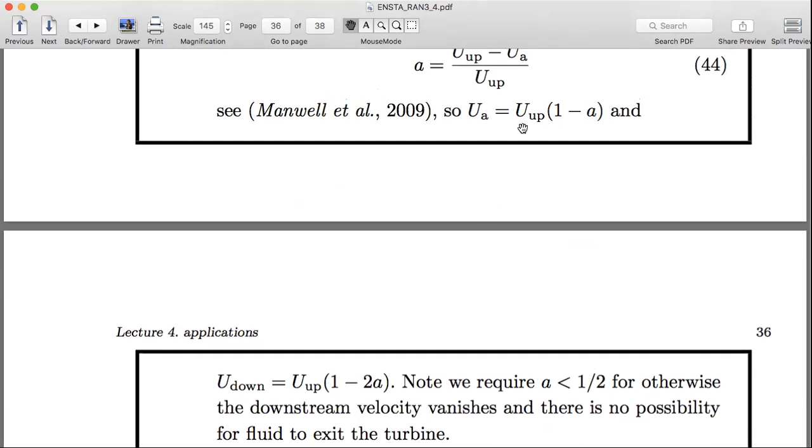And then we just manipulate this thing so that we have UA written, the actuator velocity, as U up times this factor involving the axial induction factor. And then we can write the downstream velocity in terms of U up times 1 minus 2A.

And we require A less than one half. If A here were bigger - say A equals one half - then you have 1 minus 1, so you have 0. Then we'd have 0 as our downstream outlet velocity, and we'd run into the problem that we wouldn't be getting rid of mass from the output of the turbine. So that wouldn't work. So A has to be less than one half.

But we'll see what it is. We want to maximize the power output. So here's where we consider the power.

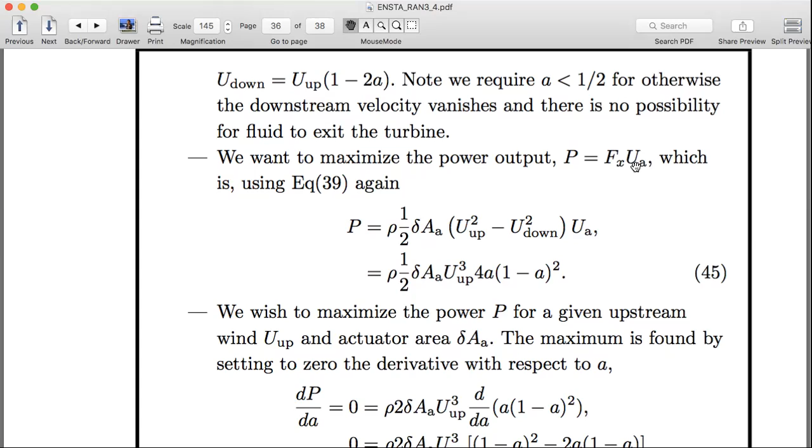Using the first expression we derived, which involved the velocity squared. Right, that's the force, involving the velocity squared, times the actuator velocity to get the power.

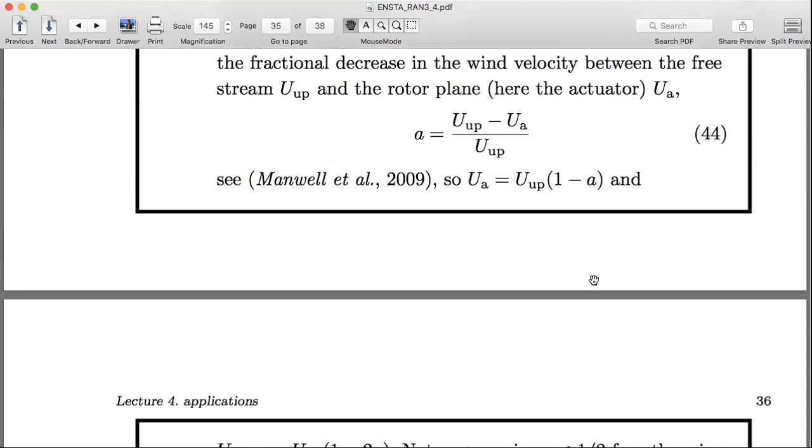And then we use these expressions we derived earlier relating the downstream to the upstream, and the U_A to the upstream velocity. So we get one U_up from that, along with a factor like that coming from there, and a U_up squared here gives us a U_up cubed times 1. I'm skipping over the details of the algebra involving the A here, but if you combine all those factors of 1 minus 2a, etc., squared here, and work it out, you come up to this term in A.

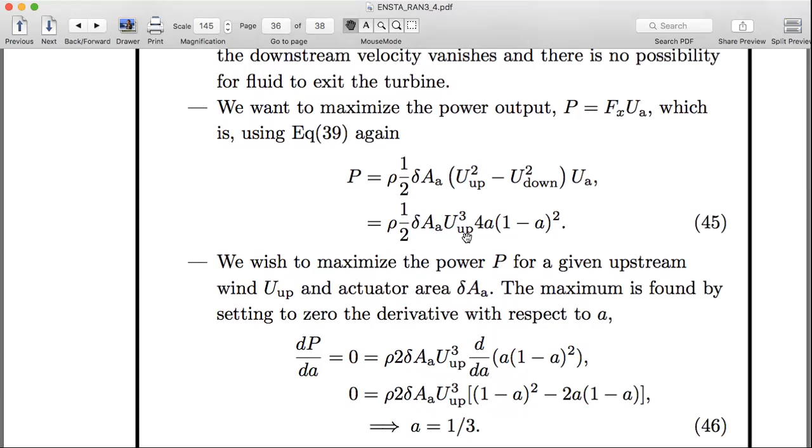That is all just to get the power in terms of these parameters. Now we've expressed the power — this is the key thing — in terms of parameters like the density, which is a constant, the area of the actuator, which is a constant, and the upstream velocity, which is some sort of input to the problem.

And then this A parameter, which is something we can imagine adjusting by tuning our turbine system. And so the question becomes, what's the best value of A such that we maximize the power?

Well, this is actually a nice mathematical expression — the power is a polynomial in A times these parameters. So in calculus, we learn to optimize these things by finding the maximum and minimum by differentiating with respect to the thing we're allowed to vary, and the thing we can imagine varying is this A.

So let's differentiate the power with respect to A and set that derivative equal to 0. That'll give us either a maximum or a minimum — we have to go back and check afterward whether it's a maximum or a minimum. I don't want to go through all the steps here, I just want you to get what the steps are, not all the details.

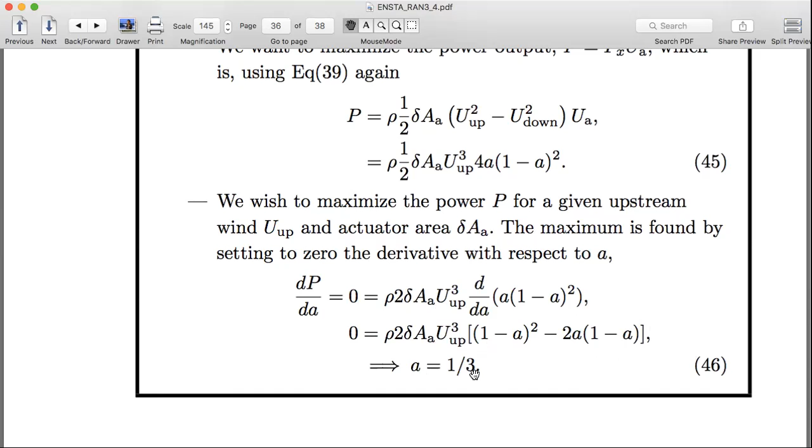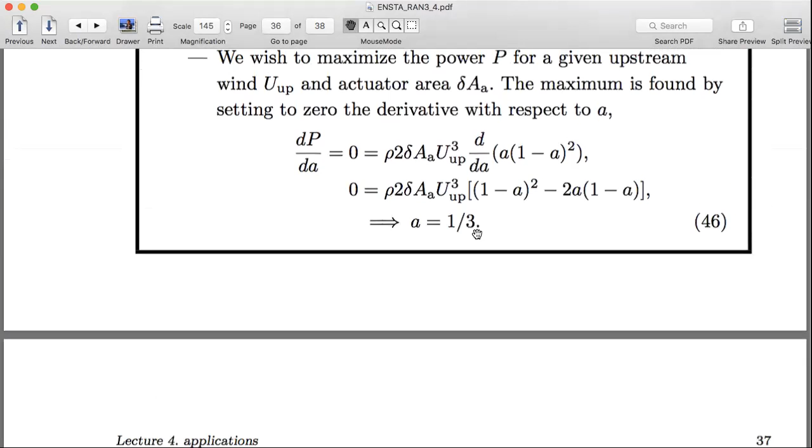So you set that equal to 0, do a bunch of algebra, and you get that this has to equal 0. These constants are not 0, so this thing in square brackets has to be 0, and it will be when A is 1/3. Again, it didn't have to be such a nice fraction, but A is 1/3. And well, there you have it — that's how you get the maximum power.

And we can define Betz's coefficient, which is, we're going to take this power and normalize it by a power that appears in the flow. So let's look at the power available in the wind — well, I have to be careful with the word 'available' because there's not 100% efficiency. The power that the wind has, let's put it that way, is 1/2 the mass per unit volume times...

...area times the velocity cubed. So this is the kinetic energy flux, or kinetic energy per unit volume flux, in the wind. That's the source of our power — the kinetic energy flux in the wind — and we're extracting that power using our turbine.

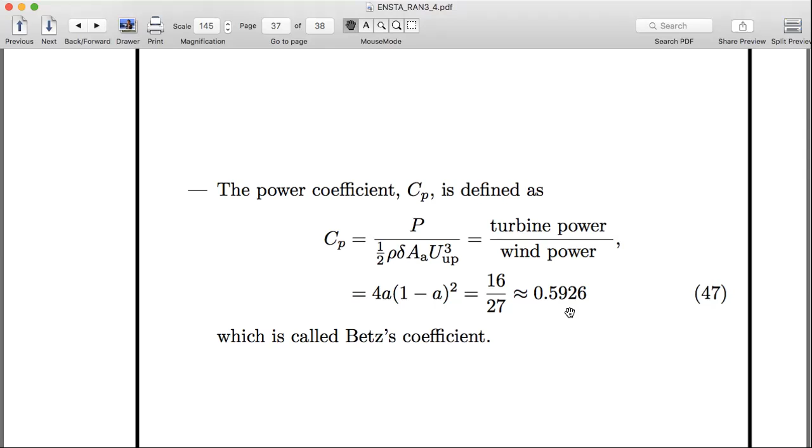So that's Betz's limit, or Betz's coefficient, the power coefficient. What it represents is the fraction of power in the wind that you can extract with your turbine, under these very ideal situations of frictionless flow, an infinitely thin turbine blade, etc., and no rotational loss in the wake. As I say, you don't achieve that in practice, but it's nice to have this theoretical limit.